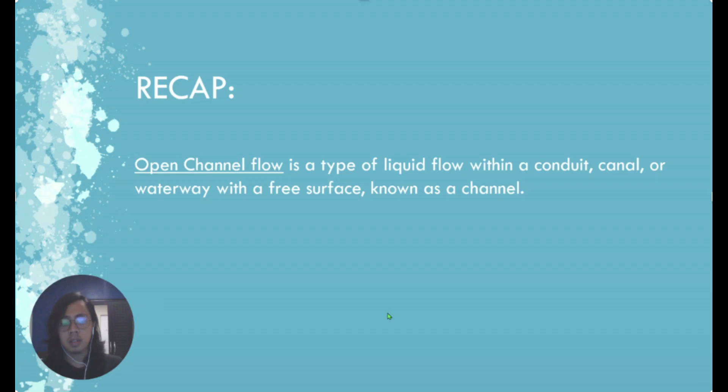The previous reporter talked about the introduction to open channel flow and about uniform flow. In my report, I'm going to talk about non-uniform open channel flow, which has two types: gradually varied flow and rapidly varied flow.

So what is non-uniform open channel flow? The velocity and other hydrodynamic parameters change from one point to another when the flow is defined as non-uniform. The cross-sectional area, depth, and velocity may vary along the channel.

Compared to uniform flow, where we do not consider the inertia forces, in non-uniform flow we consider the increase and decrease in the velocity of the flow.

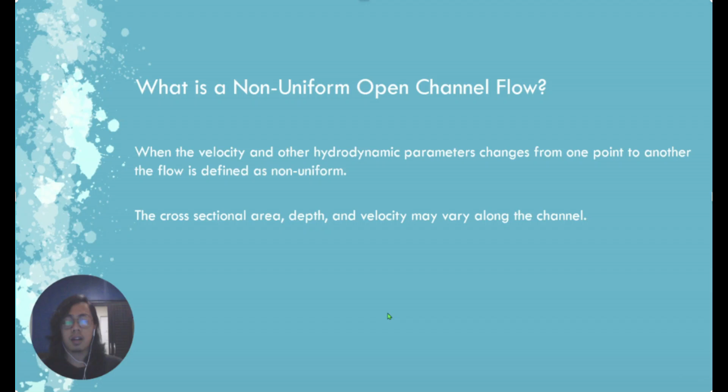Also, unlike uniform flow where the flow is stable throughout the channel, in non-uniform flow we have a bed slope and an energy grade line slope that affect the flow depth and velocity of the water.

For the first part of my report, I'll talk about gradually varied flow in open channels. Gradually varied flow is defined as steady, non-uniform flow in a channel where there are gradual changes in water depth, and the losses are negligible.

The loss of energy is mainly due to boundary friction. Gradually varied flow is a change in flow depth through space.

In gradually varied flow, the channel is of course non-uniform. We are experiencing changes, but the change in flow depth and velocity happens very slowly, gradually, throughout the whole channel.

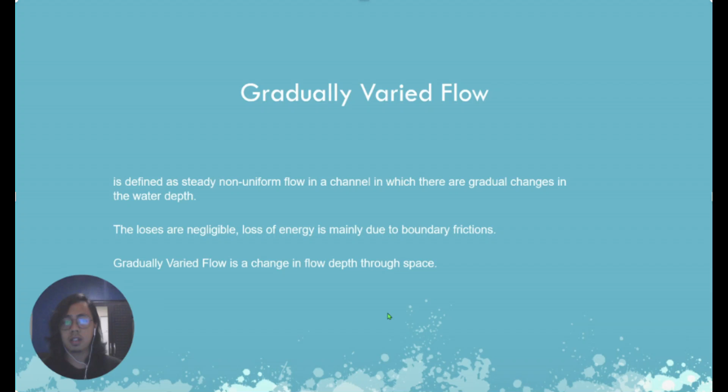Also, our energy loss is only due to boundary friction. The head loss is negligible, so it is not included in the calculations.

Here's a sample formula for solving the slope of the water surface: bottom slope minus friction slope, all over 1 minus Froude's number squared, equals the slope of the water surface.

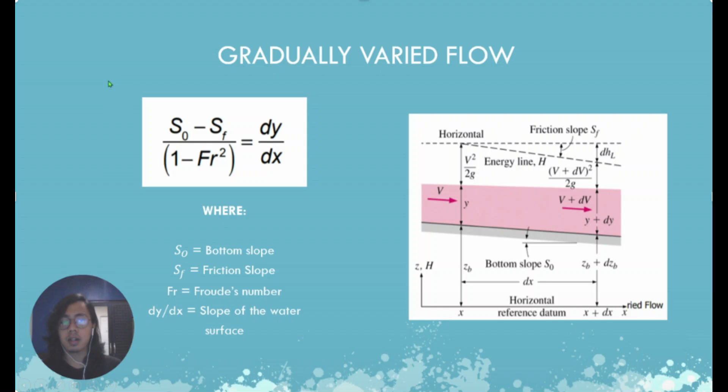If you refer to the image on the right side, you can see at the bottom the bottom slope SO, and at the top, the friction slope SF. This formula assumes a rectangular channel.

For the formula of gradually varied flow, Froude's number and the friction slope SF values are always positive, and the bottom slope SO is positive for downward sloping sections. Refer to the image on the right side.

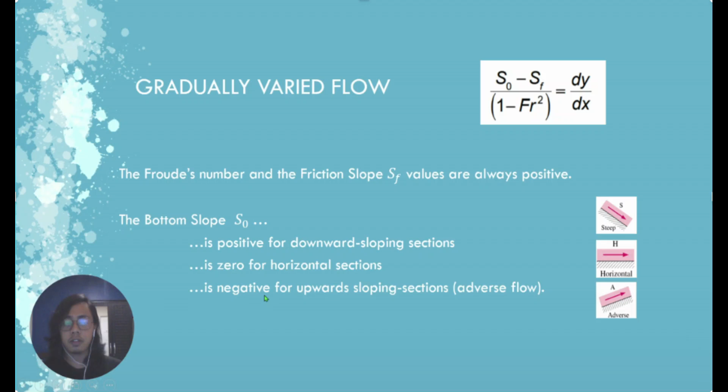This is a sample of a downward sloping section, a steep slope. The SO is 0 for horizontal sections or a straight line, and it is negative for upward sloping sections, which we call adverse flow.

Next we have the results for gradually varied flow. The trend of this formula is the flow depth. The flow depth depends on whether it increases, decreases, or remains constant, depending on the sign of dy over dx.

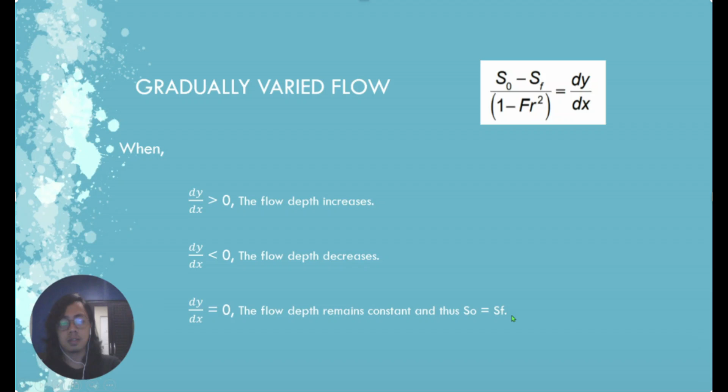When dy over dx is greater than 0, the flow depth increases. When dy over dx is less than 0, or negative, the flow depth decreases. And if dy over dx equals 0, the flow depth remains constant, meaning SO equals SF, resulting in a horizontal slope since SO and SF are equal.

So why is it important? Why do we need to study the depth of flow in various spots in an open channel? Open channel systems are designed and built on the basis of the projected flow depths along the channel. Therefore, it is important to be able to predict the flow depth for a specified flow rate and specified channel geometry.

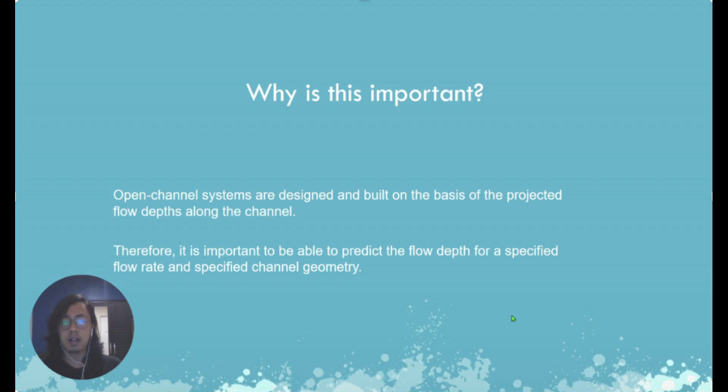So when we design open channels, our basis is the flow depths along the channel. That is one of the bases.

Next is the gradually varied flow surface profile. A plot of flow depths gives the surface profile of the flow. The general characteristics of surface profiles for a gradually varied flow depends on the bottom slope and the flow depth relative to the critical and normal depth.

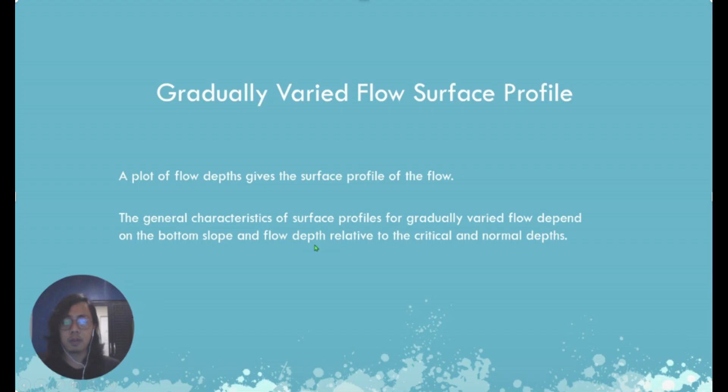When we designate or label a surface profile, it depends on the bottom slope and flow depth. To further explain this, here we have the gradually varied flow surface profile. As you can see, the slope can be steep, critical, mild, horizontal, and adverse, labeled as S, C, M, H, and A.

The channel slope is mild, or M, when the normal depth is greater than the critical depth. Normal depth is Yn and critical depth is Yc. The channel slope is steep if Yn is less than Yc. It is critical if Yn equals Yc.

It is horizontal if our S0, or the bed slope, is 0. Therefore, we have a 0 bottom slope. And it is adverse if S0 has a negative value. Therefore, we have a negative slope.

For the numbering of the types of flow, refer to this image at the bottom right. If the flow depth is greater than both Yn and Yc, it is labeled as number 1. If it is between Yn and Yc, it is number 2. And if it is below the critical depth, then it is labeled as number 3.

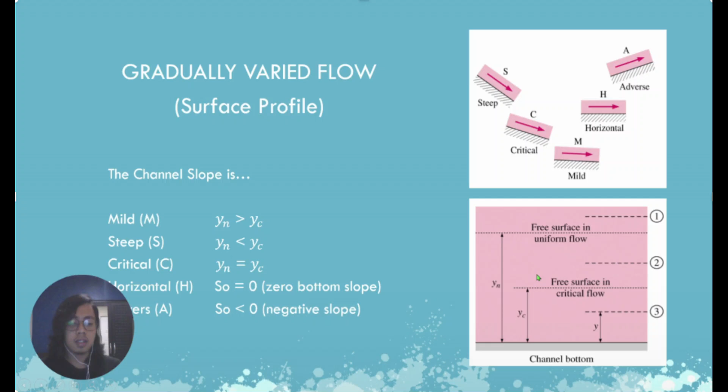And for the flow depth, for number 1, Y is greater than Yn. Referring back to the past slide, if Y is greater than Yn, then it is number 1. That's why it's labeled or designated as M1. Same with M2 and M3.

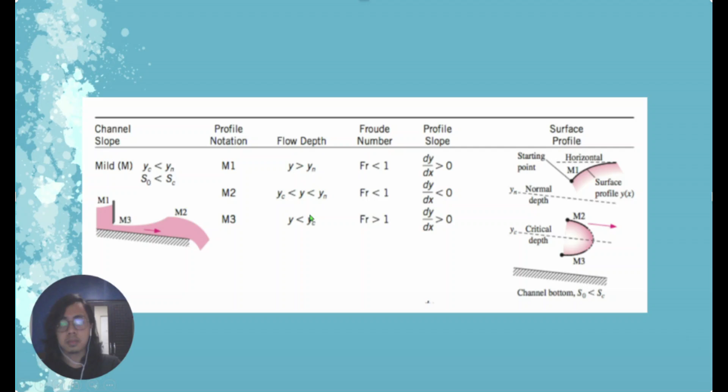So for the second part of my report, I'm going to talk about rapidly varied flow in open channels. Rapidly varied flow is another type of non-uniform open channel flow where the fluid depth changes rapidly over a small reach of the channel.

Compared to gradually varied flow, where the flow is steady and the changes in velocity and water depth vary very slowly and gradually throughout the channel, in rapidly varied flow it happens instantly, almost suddenly.

So the fluid depth and the velocity can change instantly. What we call this event is a hydraulic jump, a sudden increase in flow depth or velocity. A hydraulic jump occurs when the flow changes suddenly from supercritical to subcritical flow.

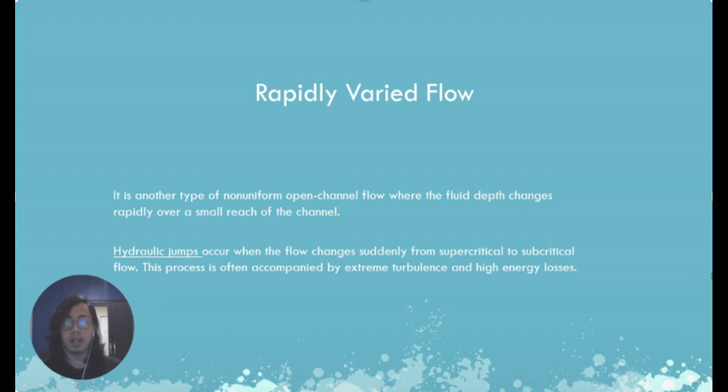This is often accompanied by extreme turbulence and high energy losses. Compared to gradually varied flow, where the main energy loss is due to friction, in rapidly varied flow it is accompanied by a high energy loss.

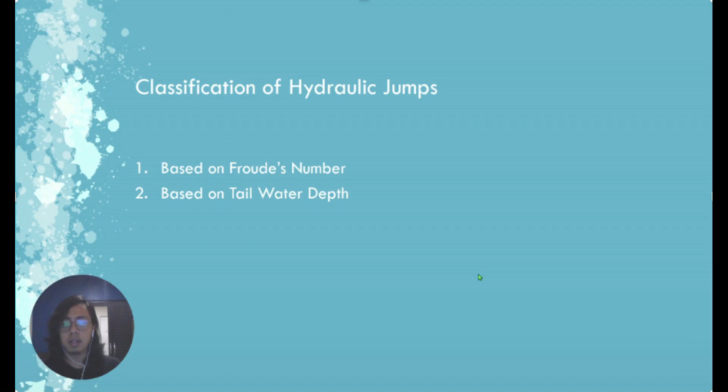So in classifying hydraulic jumps, we can classify it based on two options or methods. Number one is based on Froude's number, and number two is based on tailwater depth. For the classification of hydraulic jump based on Froude's number, we have this image right here.

If the Froude's number is between 1.0 to 1.7, we have undular jumps. If it's between 1.7 to 2.5, we have a weak jump. If it's 2.5 to 4.5, it is an oscillating jump. If it's 4.5 to 9.0, it is a steady jump.

This steady jump is considered the most optimal when you design a channel. It also has the best performance regarding hydraulic jumps. And lastly, if the Froude's number is 9.0 or greater, it is considered a strong jump.

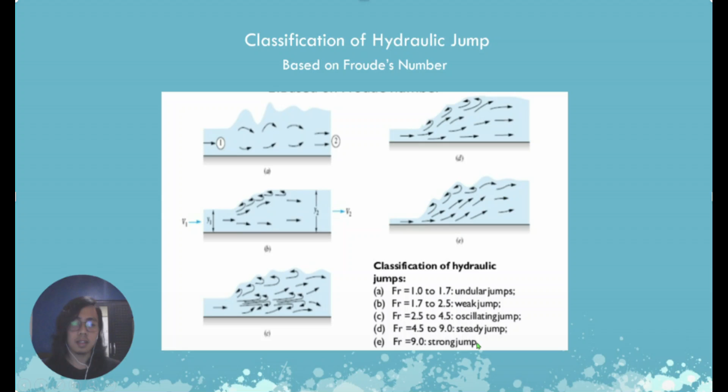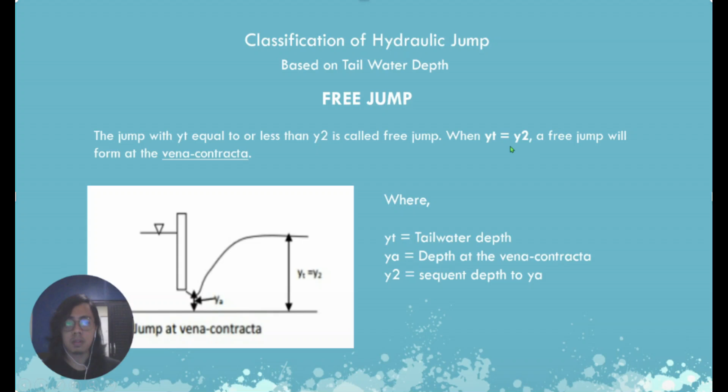Next, we have the classification of hydraulic jump based on the tail water depth. First, we have the free jump. The jump with YT equal to or less than Y2 is called a free jump. YT is the tail water depth and Y2 is the sequent depth to YA, which is the depth at the vena contracta. When YT is equal to Y2, a free jump will form at the vena contracta.

Next, we have the repel jump. If YT is less than Y2, the jump is repelled downstream of the vena contracta through an M3 curve or maybe an H3 curve. Regarding M3 and H3, as discussed earlier, these are designations for the type of flow. M means it has a mild slope, and the number 3 means that the flow depth is less than the critical flow. Similarly for H3, it means it has a horizontal slope with a flow depth less than the critical depth.

The depth at the toe of the jump is larger than YA. Such a jump is called a repel jump. This repel jump can also be considered a free jump because it satisfies the equation YT, which is less than Y2.

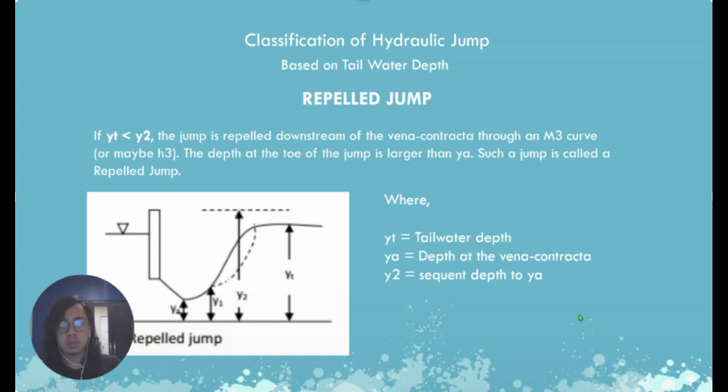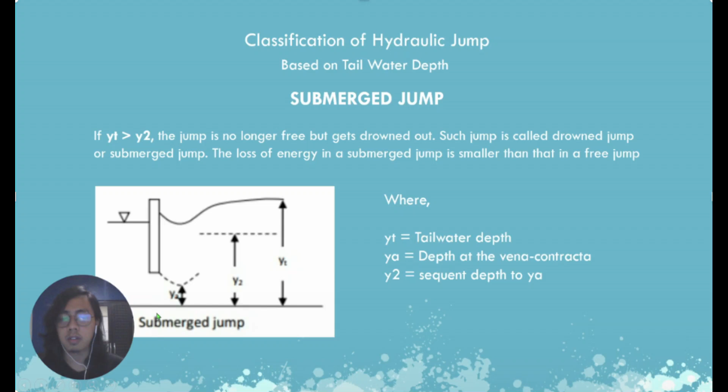As you can see in this image, the YT is much greater than the Y2, and also the level of water is above the opening. It's just much higher.